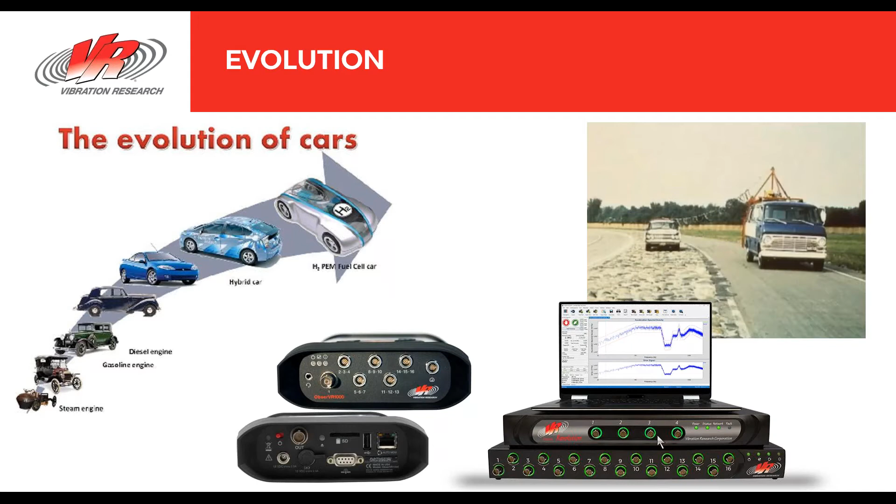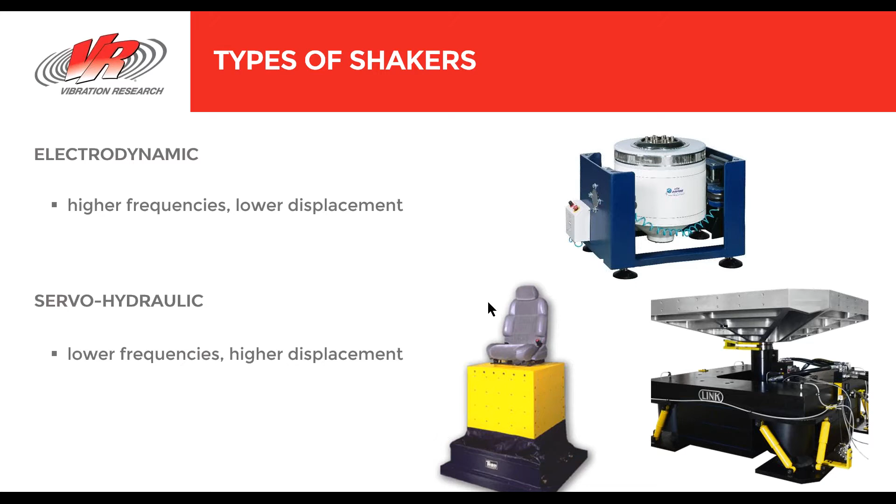So that's an individual component, but like we looked at here, you can see the whole seat assembly with the seat belt mounted to the shaker, so you can do whole components instead of just an individual component. You could do it with the whole seat there. You obviously need a larger shaker for that, or in this case, you do the whole car, and that is another method, but that's an even larger shaker. And depending on where you are in creating some of these profiles, you might only need a small shaker or something much larger.

Some of the changes in the industry are multi-axis testing, running simultaneous multi-axis. So you could do X, Y, and Z all at the same time. And that will give you something more realistic. That can be a big push as well. I've been seeing more and more specifications on that. The majority of the specs that I've seen, talking to others and other customers, are single axis specifications, but there has been a push by some of the manufacturers on down

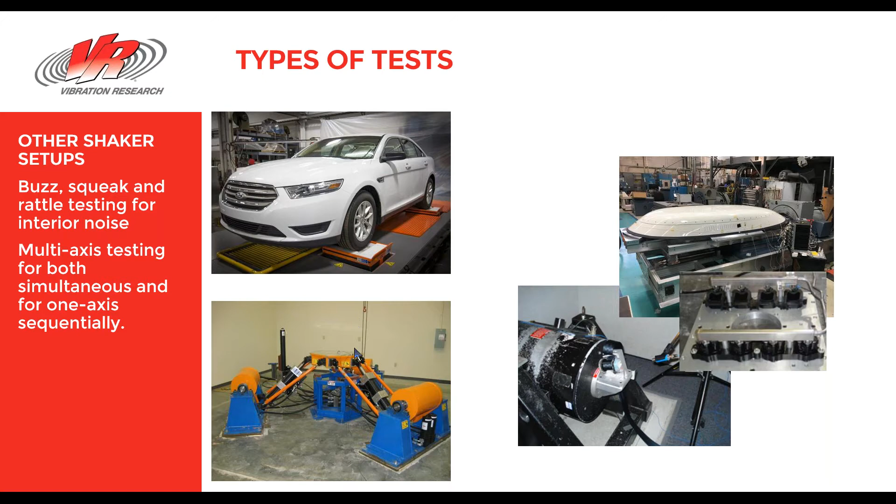to get more tri-axis or multi-axis testing with X, Y, and Z on shaker systems, but those are typically really big shakers. This isn't necessarily the same type that you'd use. This is really more a seismic application, but you could do X, Y, and Z on this type of setup as well. You can do that with an electrodynamic type setup where you have X, Y, and Z, and there's a few manufacturers out there that do that as well.

Charge type sensors are also something you can hook up to the controller of the 9500 and the VR10500. You will need to supply power to that and externally condition that signal. But there are some charge amplifiers you can use in that case, and sometimes that can be necessary. Most times when you're using charge type sensors, people are doing shake and bake testing, where they have temperature ranges going above 275 degrees Fahrenheit, because that's usually the standard limit for many IEPE type sensors I've seen. Some IEPE type sensors can go higher than that as well, but that's where people like to use charge mode. It's a pretty small piece of the market, but still necessary when you go to those high temperatures.

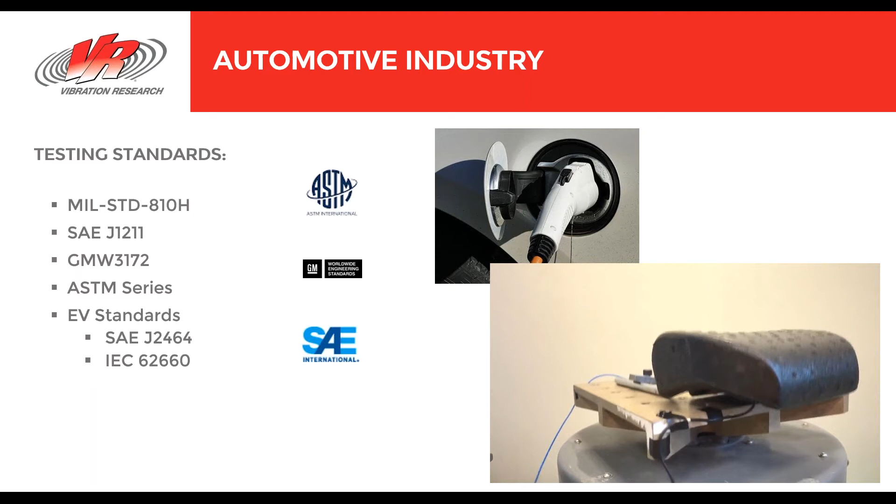But the majority of what we see is sine and random, and I'm going to enter a few test specs for that. So with sine we're just doing one frequency at a time, and you can find a resonant frequency of your product to see if that's going to be affected in the real world. With random you can excite many frequencies at the same time. So that's good for seeing what's happening to your product, because your product's not going to see just one frequency at a time.

So you can hit it with a whole bandwidth of energy at the same time, because that's what it's going to see when you go to the real world. And then there's drop or bump tests, these shock replications that you can do to your product. Hit it with maybe a half sine pulse 11 milliseconds wide, 10 Gs or something like that. Those are also common in the industry. It has to be able to withstand many different shock pulses to replicate different events that the product can see.

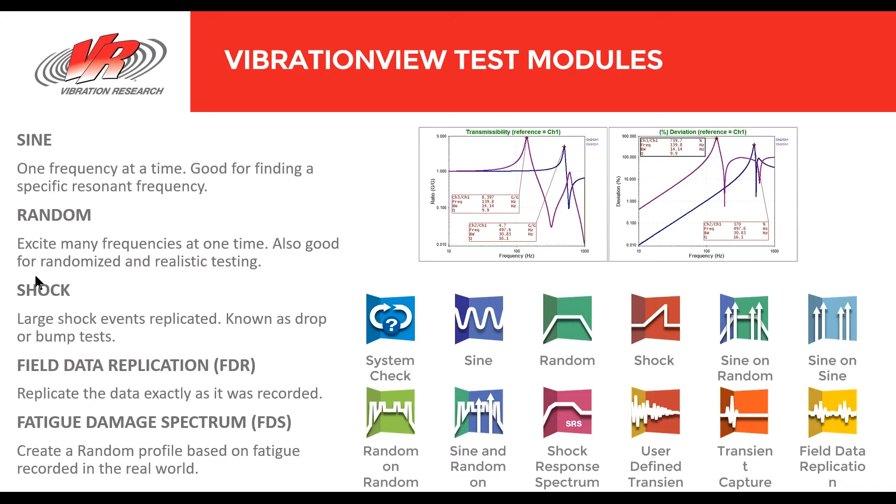Field data replication is something that is also seen, running that back on the shaker 1-to-1, and fatigue damage spectrum takes that recording that you would use in field data replication, FDR, and runs it in FDS in a randomized way, looking at fatigue that you saw in the real world and getting that back in a random test. So I'm not going to spend as much time on those last three, but those are just some of the use cases of software that are also used in the vibration testing world here for automotive. But we'll look at a couple of standards for sine and random here.

All right, so this is a specification from an auto manufacturer, and I think this one has 6 different classifications. Let me make this a little bigger on mine. What you're going to have is the classification given to you by the manufacturer, and you have to say, okay, I need to be able to pass classification 1, vibration method A, and this is maybe a mild, where the product is going to be mounted on the body away from the suspension attachment point. So then you can kind of figure that out. Okay, this is going to be here, and I need to do vibration method A.

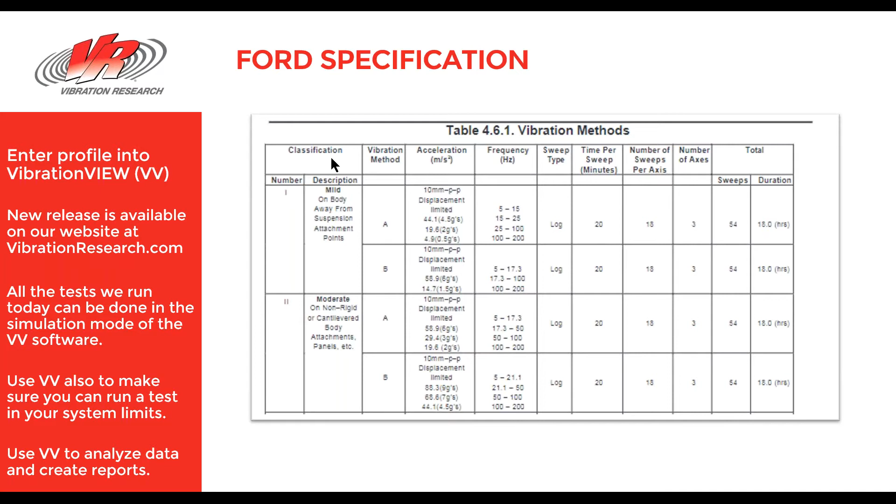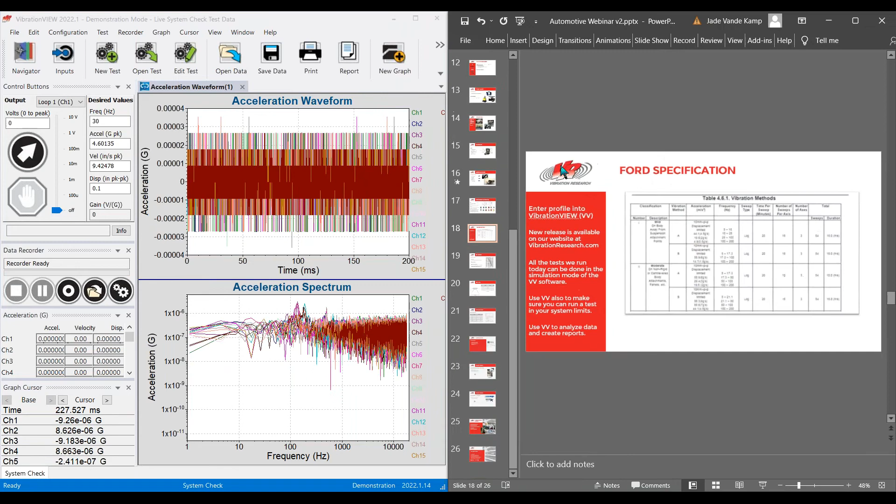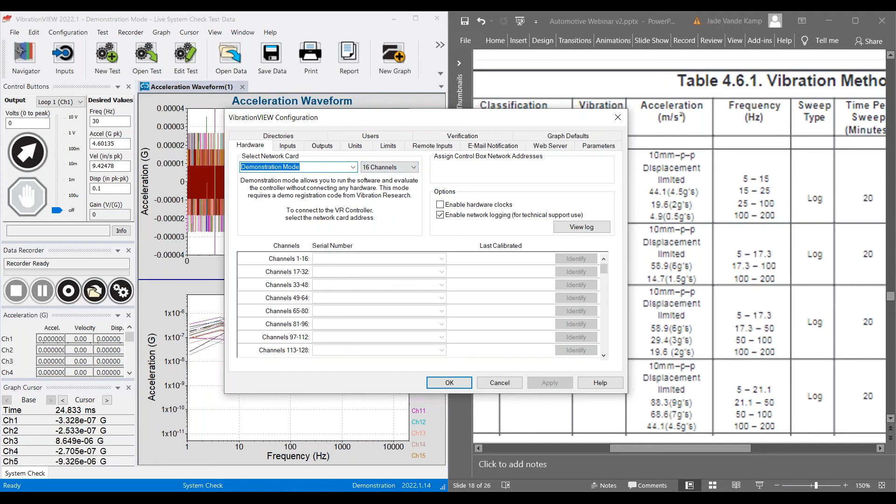Typically that type of standard is going to be given to you, and I'm going to run through how to enter this specific test profile in the software right here. So let's enter a couple of these. Let me just make this a little bigger here. Zoom in, here we go. All right, so new test. Again, I'm in VibrationVIEW 2022.1 software, and you can download this and use it yourself. If you go to hardware, you can just use demonstration mode. It's the same software that you'd use connected to a 10500 or a 9500. I encourage everyone to get on and use that as well.

So, new test, and I click sine. And so here is my test, and this is what's called quick test mode. For this test, I'm going to show you how to enter it in advanced mode. I'll come back and show you something in quick test mode in just a moment. When I go to advanced test, I'm going to go to the profile tab, and for entering this test in, I have 10 millimeters peak to peak. So it's got displacement in peak to peak, which is how we have this in the software. But the low frequency here from 5 to 15 hertz is displacement limited. So 10 millimeters peak to peak is what the software is going to be running from 5 to 15 hertz. I'm going to be going to acceleration next, but I can do this all in the same profile.

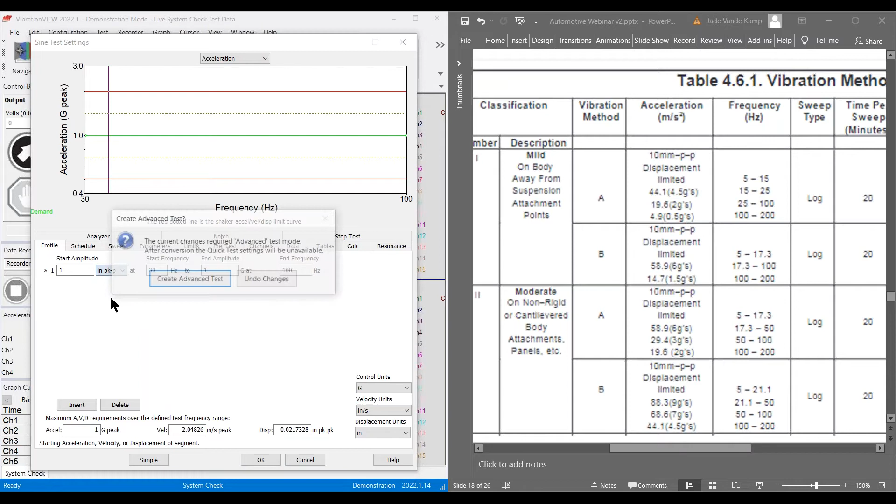You can see I have G's, inches peak, inches per second, and inches. So that's acceleration, velocity, and displacement. Right now it's in inches, but I can change my units. Create advanced test. I can change my displacement units here. Instead of inches, I'll change this to millimeters, because that's what this specification is, 10 millimeters. So I changed this to displacement instead of acceleration, and it's 10 millimeters at 5 hertz to 10 millimeters at 15 hertz. Insert. And then I have 20. So now I'm going to 4.5 Gs. Change that to 4.5.

Out to 25 hertz. So we're going to go out to. The software also gives me this little calc button here. So it's telling me there's a little bit of a discrepancy probably between where the crossover point is at 15 hertz. The specification was probably written with, hey, 10 millimeters is approximately 15 hertz, where it changes from 10 millimeters to 4.5 Gs is almost exactly at 15 hertz.

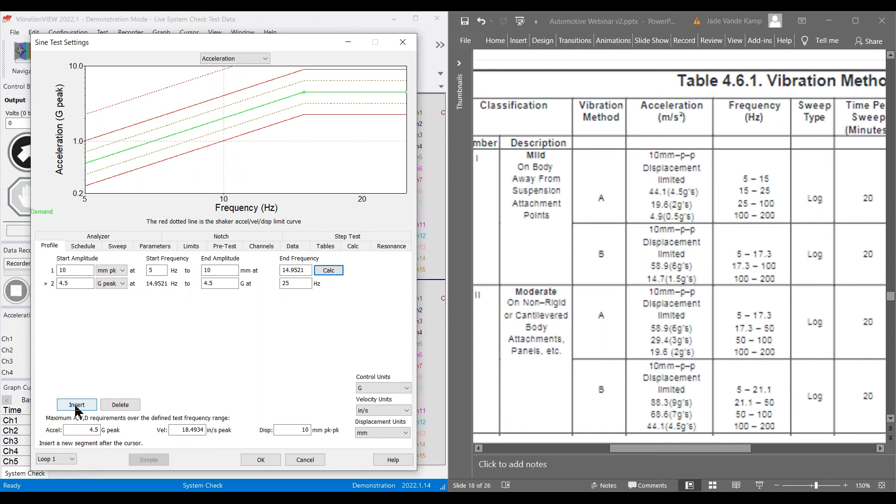I hit insert 2 more times because I've got 2 more lines to put in here. So 25 hertz and 25 to 100, and 100 to 200 is my profile. This one is going from 4.5 Gs down to 2 Gs for this higher frequency range, so it's kind of stepping this down. And then the last part, 100 to 200, is 0.5 Gs. So I'll just type in 0.5, 0.5. And now I have this profile entered.

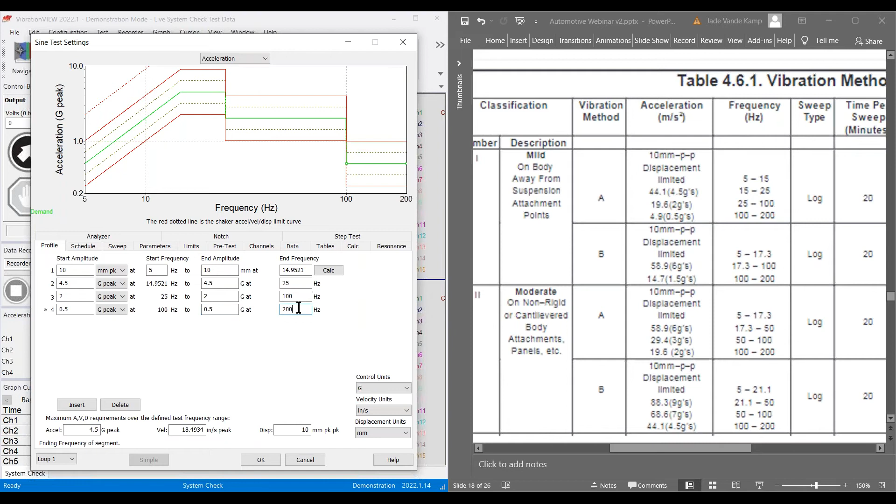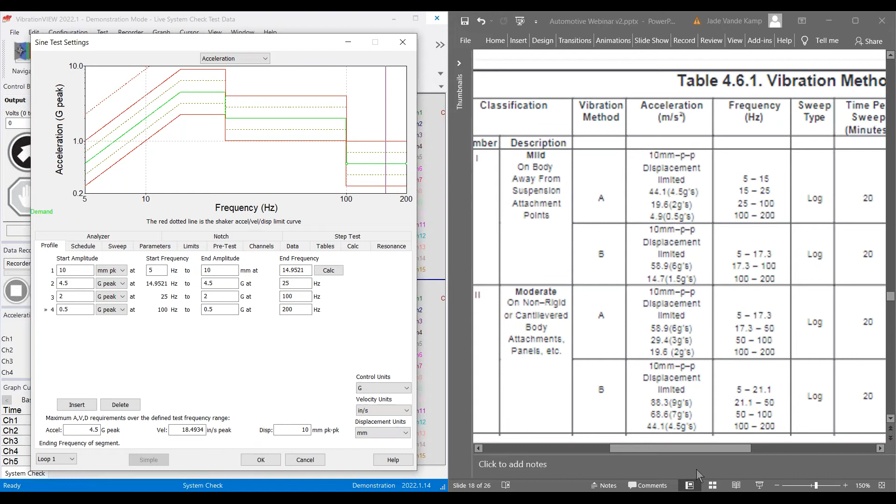So I'm doing this sine sweep. It's controlling on displacement. If I look at displacement, you can see displacement's flat, and then it steps down, slowly brings down displacement. You can see acceleration is constant, it's just stepping that down. So that's what we just entered for this profile with the classification number 1 description in vibration method A.

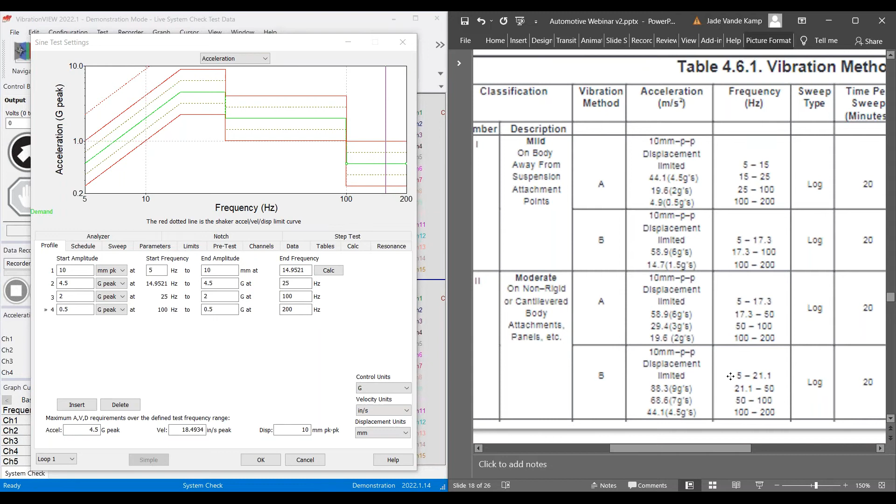One other thing on this profile is time per sweep in minutes: 20 minutes per sweep. That can be put in here in the sweep tab. This is a pretty slow sweep, but in the sweep tab I can do minutes per sweep, and it's 20 minutes per sweep. What VibrationVIEW considers a sweep is going from low to high. That's one sweep. If you need to go from low to high back down to low, we would call that 2 sweeps.

So time per sweep is 20 minutes. If I look at my schedule tab, it says 20 minutes, because I'm saying one sweep, but it says number of sweeps per axis: I need to do 18 of them. So if I put in 18 here, it says it's going to take 6 hours to do 18 sweeps of 20 minutes from 5 to 200, and back down is another sweep.

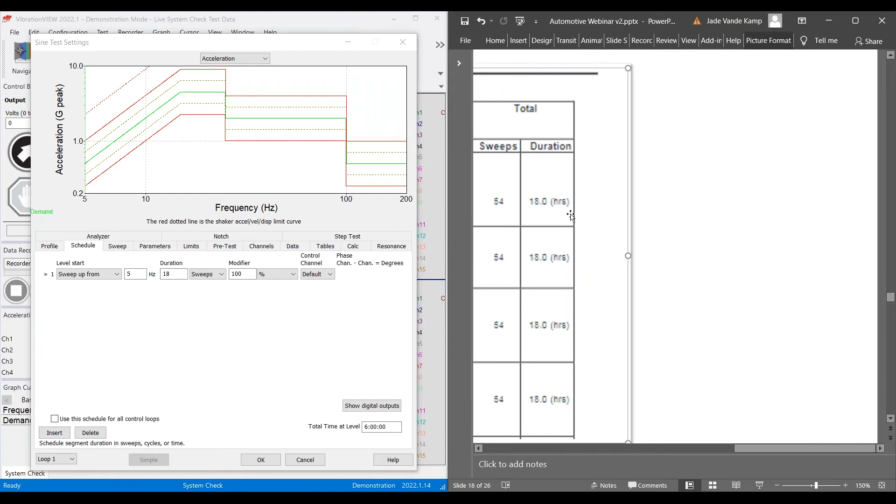If I go over here a little bit, it says the whole test is going to take 18 hours, which makes sense because I need to do this for each axis, X, Y, and Z. So I would need 6 hours to accomplish X, then turn the product and do Y and Z, 6 hours each. So that's 18 hours.

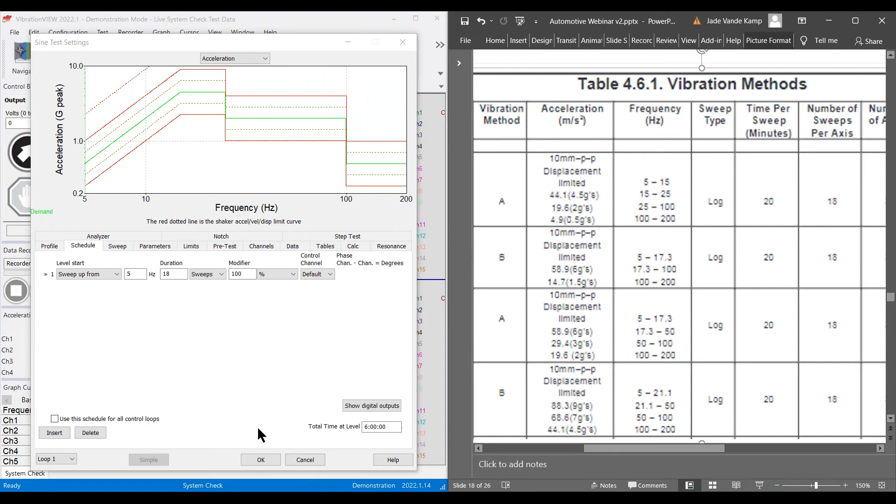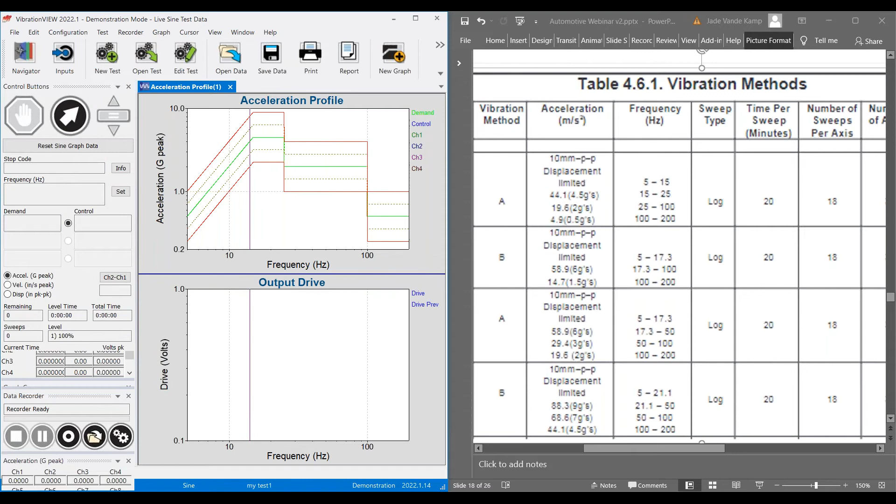All right, so give that test a name and it's ready to go. And then it has the profile name of my test at the bottom of the software as well. So every time I enter another test, it shows up in tab form here.

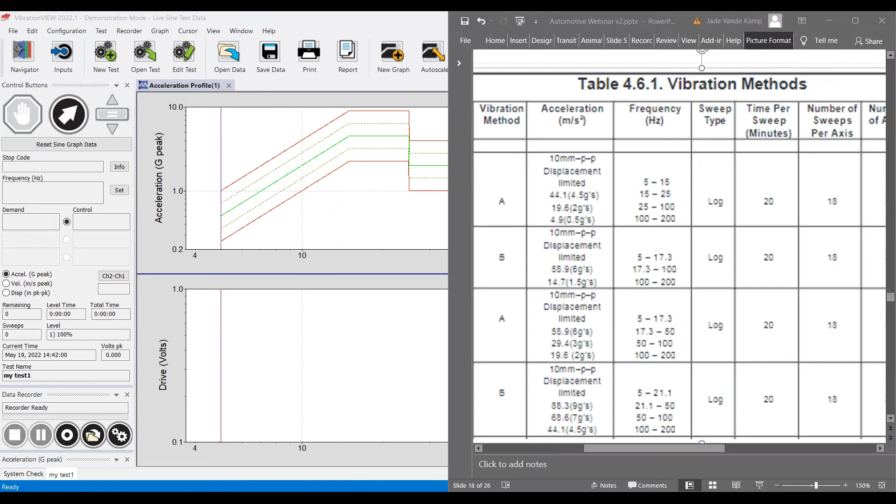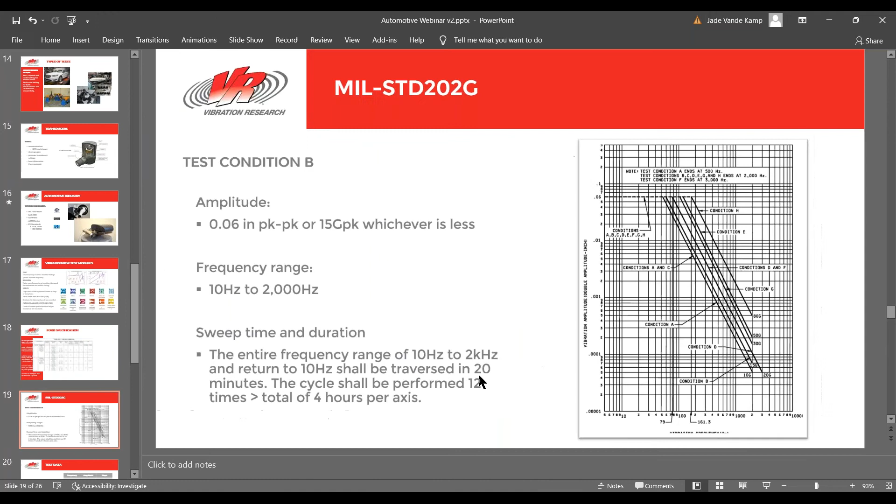All right, so the next test we want to take a look at, bring this one up. This is MIL standard 202G. This is for electronic components that go in a car. There's so much electronics going into cars nowadays, and it continues to be more and more. We can look at test condition B on the graph here.

It's really some of the same stuff. You just have to define how some of the acceleration levels are done off the graph. We're looking at test condition B, and we have an amplitude of 0.06 inches peak to peak, or 15 Gs, whichever is less. So this is another sine test. The reason I'm looking at this one is because we're going to run it in simple mode, so I can show you a quick way, when you get a specification that says 0.06 inches peak to peak or 15 Gs, whichever is less, to accomplish this in the software.

All right, so new test, click on sine again, and I'm going to stay in quick test mode. And this was, let me look at this, 0.06, so 10 to 2000. There we go. 10, 2000. And then it told us 0.06 inches or 15 Gs. So let's enter that. Displacement of 0.06 inches peak to peak, or 15 Gs. So I'll type that in here as well.

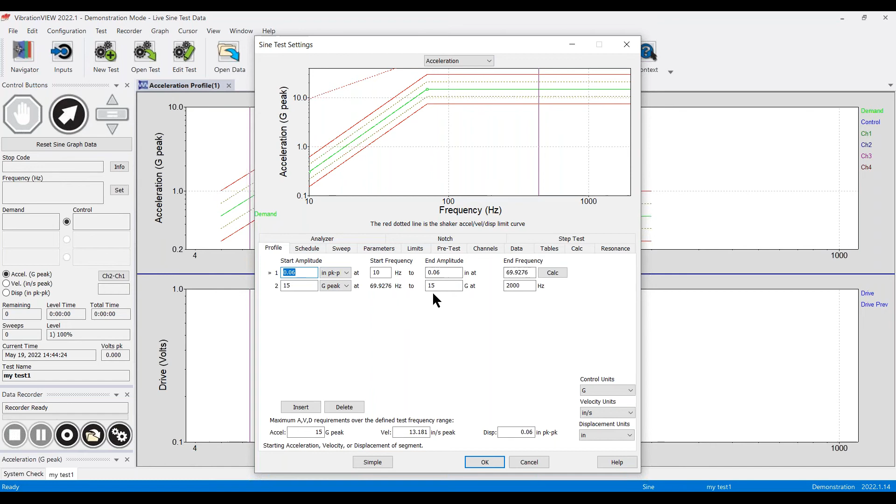And now you can see the software automatically calculates this point, kind of like where we were clicking the calc button. The software's automatically doing that for us here. So I have 10 to 2000 hertz and 0.06 inches peak to peak and 15 Gs. And the software is going to do whatever it needs to do to make that work. So if I go back and look at the profile tab, I can see it automatically did this calculation of 69.9 hertz. And that's where that crossover point is. So the software's doing some of that automatically for you. All right, so that's a little piece of that standard.

Let's look at another one, and this time we're going to take a look at random. This random test is one I like to look at. Many of you have seen this one. Maybe many of you have run this one, the NavMat test, the haystack, as it's sometimes referred to. You get all the energy really here in the midsection of the vibration profile, 80 to 350 hertz. But what's unique about this profile is it gives you 4 frequencies, 20, 80, 350, 2000, but it only gives you 2 amplitudes, which is not as common for vibration profiles.

Typically, people who make vibration profiles like to throw some tricks in there, I kind of feel. And this is one of them where you need to have this calculated. They give you the slope though to calculate this value here, but the amplitude is known and the slope is known for both sides of the top and bottom frequency. So we can calculate that. So I'm going to show you how to do that in the software. But remember, we're going to make sure that we run this with just over 6 G's RMS on the test that we're creating.

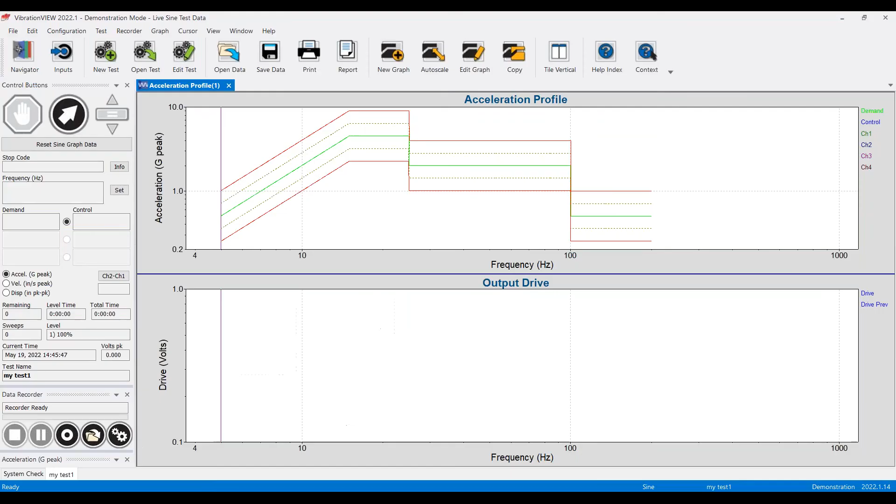So let's go back in here, click New Test, Random, and I'm going to do this in advanced mode. So I say 20, 80, 350, 2000. We know that this was 0.04 at 80 and it was 0.04 at 350. This is where it starts to get interesting. So we know these values, all 4 frequencies, and we know these 2 amplitudes. So what you can do in the software is calculate this value here. If I first click in this known value, then in this known value, you can see that this turns yellow. It says, hey, because you clicked that way, we're going to calculate what this is going to be.

So the software is ready to calculate that, and we know from the spec this was 3 dB per octave. I can hit the tab button, or just click outside the box, and it gives me what this calculated amplitude is if at 80 hertz it is 0.04 and the slope between 20 and 80 is 3 dB per octave. This is 0.0100475. So you can kind of see why they made the spec this way, because 3 dB is an easy value to write, and this would be kind of cumbersome to put in the spec.

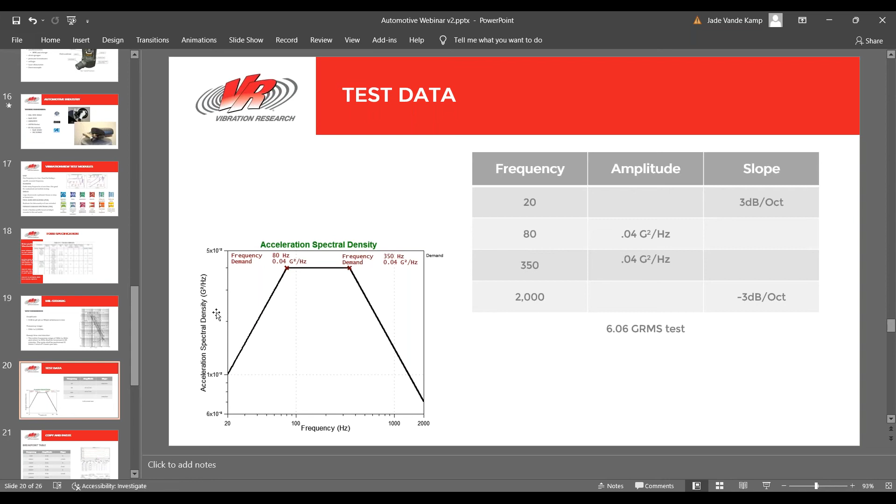So I'll do that again. Click in my first known value at 350. Second known value for the slope is a -3. And I'll hit the tab button outside there and I get this long significant digits, 0.00704187 G squared per hertz. And now I have a GRMS of 6.06. And that is what we were looking for here, 6.06 G's RMS. So that is the NavMat test ready to run. All right, so one more neat feature I'll show you.

In the VibrationVIEW software, I've seen a lot of specifications in the automotive industry where the specification might be coming from a road load profile. Or it's just a profile with lots of breakpoints. Frequencies and amplitudes come in an Excel sheet or some other type of PDF. And there's a really nice way that you can pull those in without entering them in the software incorrectly, because you could have significant digits way out here. But I'll just show you this. This is a specification that I had received.

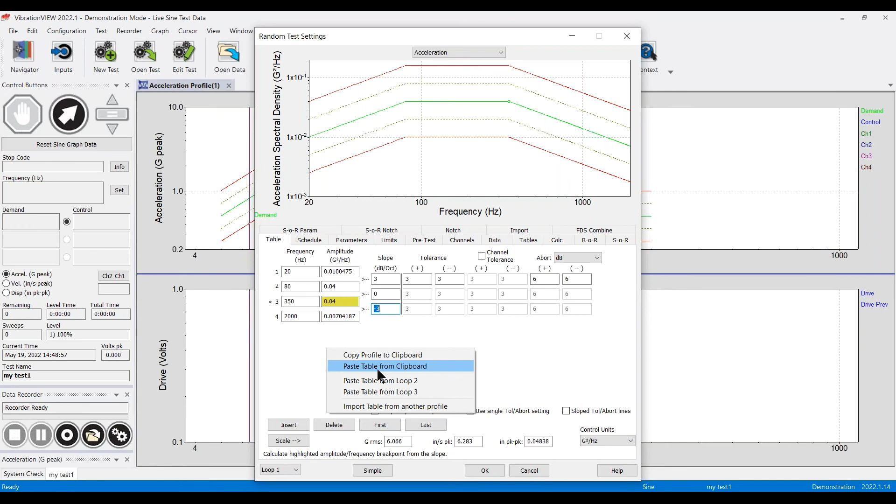I can just right click, or let me show you again. I'm highlighting just the frequencies and amplitudes that I want to pull into the software, and I right click in Excel and say copy. Go into VibrationVIEW. Anywhere inside this white space of my breakpoint table, I right click and say paste table from clipboard. Again, I'm right clicking in this white space here of an advanced test, and I say paste table from clipboard, create advanced test. Yep. Are you sure you're going to get rid of all these other segments that you put in there? And I'll say okay. And then it automatically pulls those in.

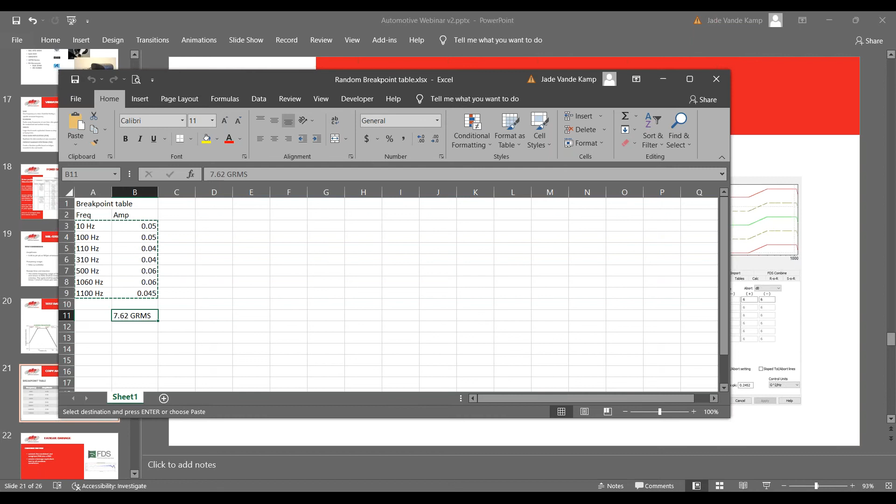So this should be 7.6 G's RMS, and I have 7.6 G's RMS in here too from my test profile. So it's ready to run this test now as well. Actually here's where it was, 7.62 G's RMS. And then you're ready to run. This could be hundreds of breakpoints long, and you just highlight it, copy it, paste it right into the white space of an advanced random test in VibrationVIEW, and you're ready to run.

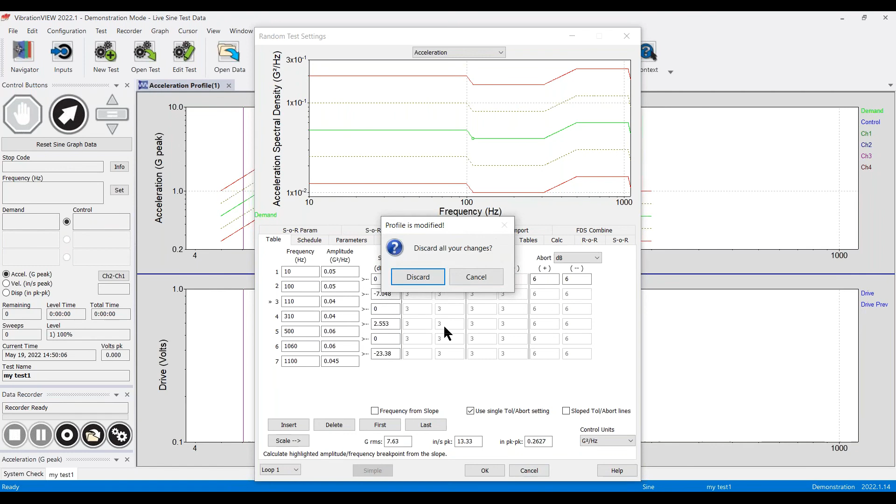Some of the up and coming things that you do also see, I'm not going to run into this in too much detail because we have a whole webinar on going field to lab with some of your data. But if you want to create a random test based off a recording, you can do that too in the VibrationVIEW software. Let me just hit cancel a second and show you that briefly, but there's a whole webinar that goes into this too. Fatigue damage spectrum.

Look for your recording. This is a recording of an accelerator stomp, hitting the gas on the car and going. You open that up, it pulls this in, and you say, okay, I want to run this test. I want an equivalent of 10,000 hours. I want to run that in 100 hours on a shaker, and then you can create a table, and then it's ready to run this profile.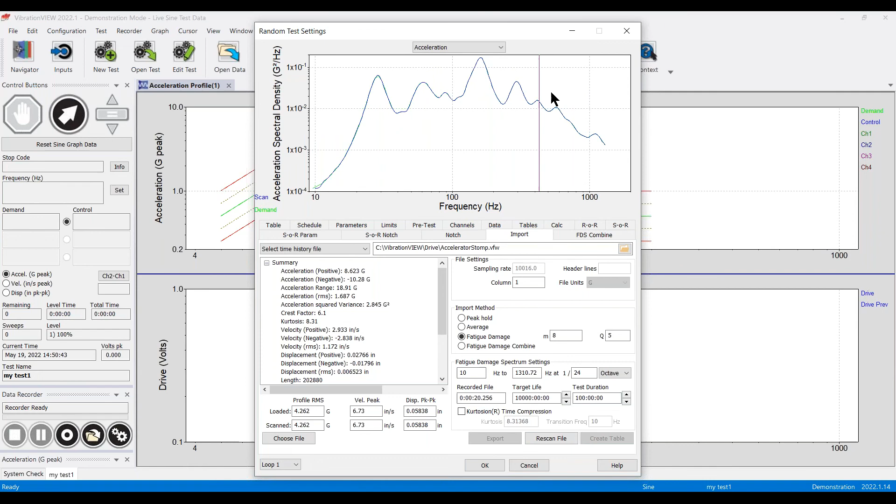If you go to the table tab, it's got that table automatically pulled in there, way down here. Schedule tab already has this in here ready to run for 100 hours. So that's a quick look. There's a whole bunch of stuff that you can do and make changes and analyze and filter data in the webinar that talks about going field to lab, but that's another application that you can do in the software.

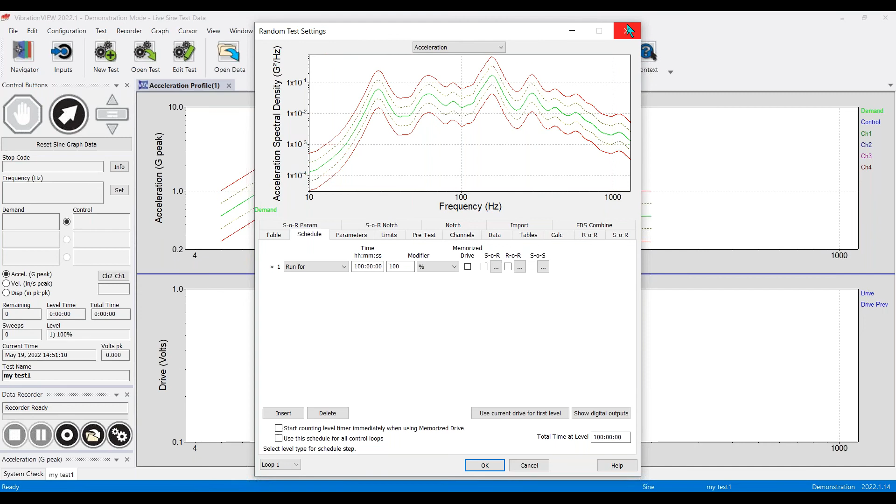All right. So the next step I wanted to take a look at is run through and talk to a couple of experts in the automotive testing field. And I reached out to a couple of people that we work with to get some of their comments on some of the things that they see in the automotive vibration testing world. And I wanted to run through that.

I hope this will work in this manner so you'll be able to hear it. I might have to use my backup way to make this work, but bear with me here just a moment.

All right, so I am talking with Eric Lindberg of Elite Electronics out of the greater Chicago area, and wanted to get his expertise on a couple of things as we discuss all things automotive testing, vibration testing specifically. So welcome, Eric. Thank you for coming. Yep, thanks for having me.

All right, so what sensors do you typically use in your vibration testing setups? We typically, and it kind of varies on job to job and depending on what customers request, but typically we use the Dytran 3056 control accelerometers, and then we throw a response on there. More recently, it's been a lot of Triax accels. Okay. And then these are IEPE type accelerometers.